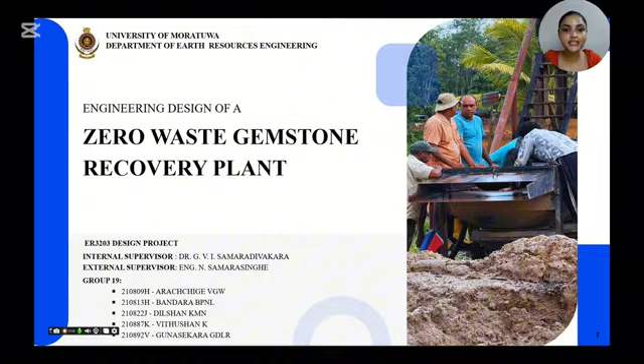We are excited to bring you our very first video, a presentation of our final year design project titled Engineering Design of a Zero Waste Gemstone Recovery Plant. Let's start the video by introducing you to the location that we considered for our design project. So basically this design is for a gem mine in Hidellana, Ratnapura, Sri Lanka.

Talking about this gem mine, they used the underground mining method in the latter part of the 20th century and converted it to an open pit mine in 2012 with a semi-mechanized approach as well. Talking about the composition of the gem gravel, it has a higher content of clay and also fine gemstones, with some minor amounts of trace gold, coarser gemstones and mineral sands, according to the gem mine owner as well as our exposure at the mine.

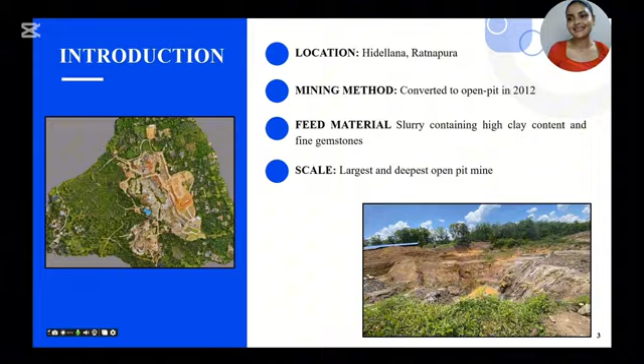Talking about the scale of this gem mine, it is known to be the largest and the deepest open pit gem mine in Sri Lanka. As you can see in the left hand side diagram, this gem mine is a placer deposit, basically a secondary deposit. Now let's take a look at a video which shows you how the current process of this gem mine works.

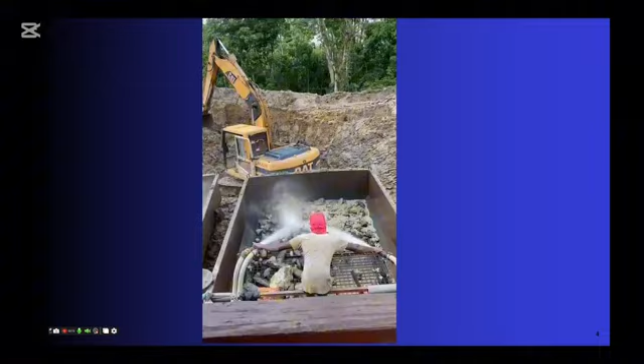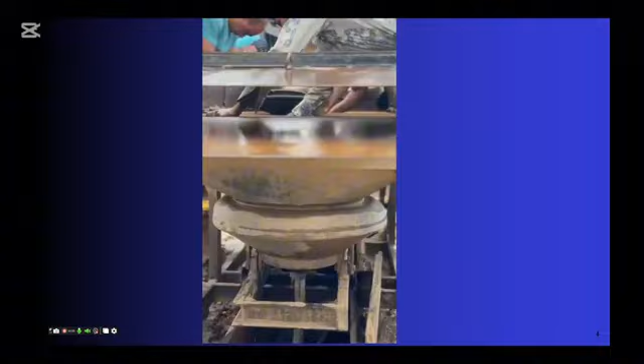Our focus is mainly on the gem recovery process in this mine, and as you saw in the video, the gem recovery process is quite simple in the existing plant. With the current process, once the gem is recovered, the slurry is sent through a continuous settling tank process. It has a continuous 10 settling tank procedure to settle the slurry and get quite clean water in the final tank for reuse. So currently this is how the mine carries out its recovery process of the gemstones.

With that we identified a couple of operational challenges, including challenges that the miners themselves are facing. The biggest challenge of all is the settling tanks filling rapidly. Currently all 10 settling tanks are quite filled with slurry and a lot of overflowing is happening, so their recovery processes have been shut down for a couple of weeks as well. Apart from that, something which rose from our end was the loss of finer gemstones in the slurry.

This has never been identified as a challenge before, especially by the industry, but it could have been. So we suggest that our design could address this challenge as well. There is also the scarcity of water here, because proper water recycling is not happening with the currently available slurry treatment technique.

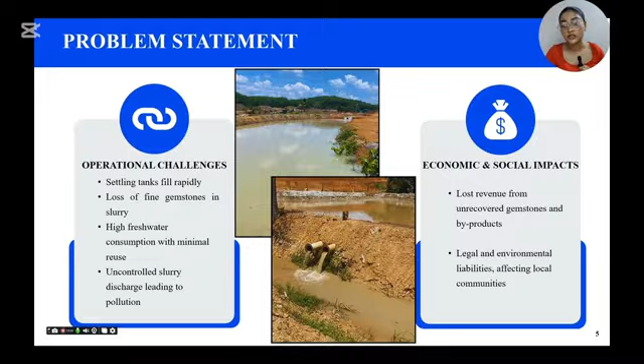Simply, our design objectives are first to maximize the gemstone recovery and also to recover byproducts such as clay, sand, and fine amounts of gold, along with finer gemstones that could be lost. We are also trying to recover mineral sands and sands as well. Another objective of our design is to operate the gem recovery plant with a closed loop zero waste process, to reduce the environmental impact and improve the economic return of the mine.

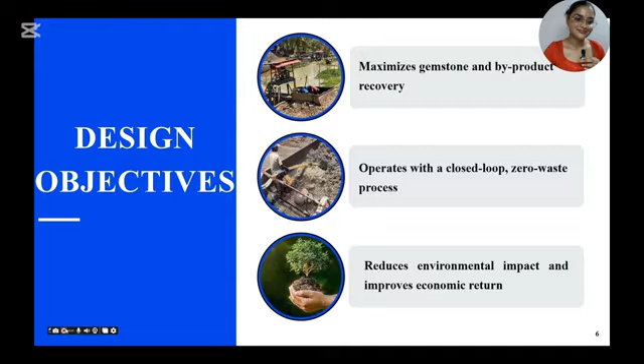With the raised concerns, we got a couple of suggestions from the industry itself, starting with the optimization of the existing plants. This was basically to have a periodic pattern for cleaning the slurry tanks.

That was one of the suggestions we got from the industry itself. Another suggestion was a mechanical slurry separation, basically to improve the slurry treatment instead of focusing on the entire plant. So those were a couple of suggestions we got from the industry. We identified that these suggestions would be temporary solutions for these problems, so we're trying to make a permanent solution in order to make a sustainable gem mining industry in the country and maybe finally in all of the world.

We also got suggestions from the industry to use trommels and vibrating screens for the gem recovery plant, to introduce flocculation for the slurry treatment, and to use the water as a controlled loop, reusing the water as much as possible without using fresh water. So that was one of the concerns we got. We were also asked to look into the economy and do a financially feasible design so that the payback would be within 2 years. These were quite practical suggestions that we got from the industry.

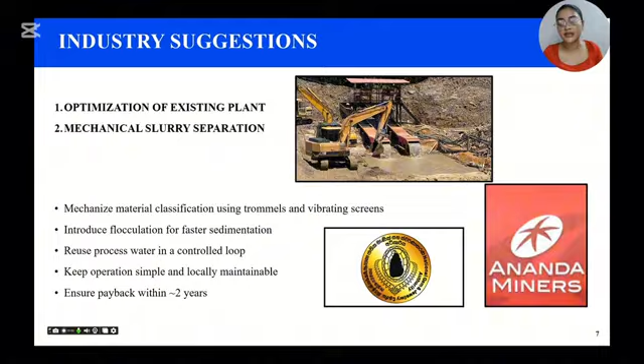Let's move forward. Here we come to our proposed solution. Our solution starts with a hopper with a vibratory grizzly screen, and once the gem gravel is input from there, it will be moved to trommel 1, which only takes particle sizes less than 50 millimeters. It will be introduced to a jig with a net size of 5 millimeters, then to a jig with a net size of 2 millimeters, and then to trommel 2, which only takes in particles less than 10 millimeters. This is basically to recover finer gold in an efficient way.

Next we are introducing the Hungarian sluice box with Hungarian riffles in order to recover the gold. Next we move forward to trommel 3, which only takes particles less than 1 millimeter. Later we will be introducing the hydrocyclone. The fine parts from the hydrocyclone will move to a coagulant tank first. In this coagulant tank we introduce the coagulant, which is moringa powder, to fulfill our requirement of going for something sustainable and biodegradable.

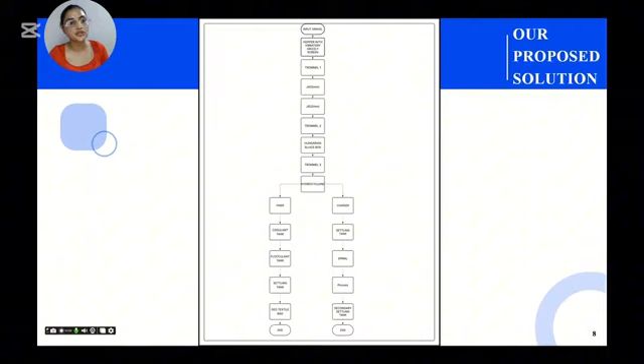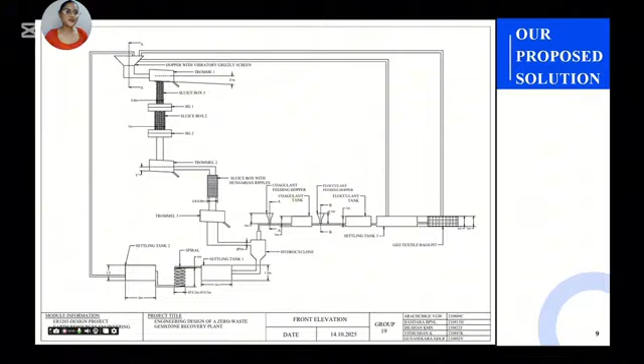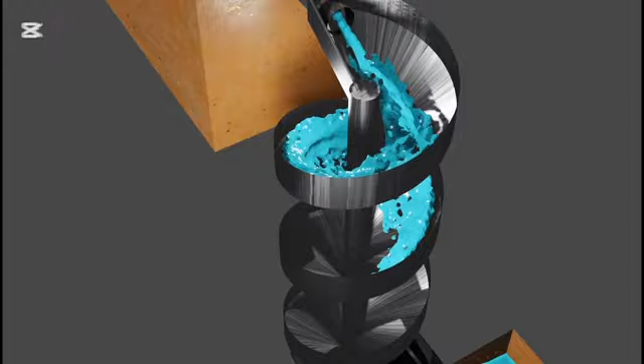Welcome to Earth Thrust Mining. In this video, we proudly present our zero-waste gem washing plant, a sustainable, continuous process designed to maximize gem recovery while minimizing environmental impact. The process begins as gem-bearing gravel is loaded into the vibrating grizzly screen through the hopper. With the help of water jets, the gravel is washed and mixed before being transferred to trommel 1, which separates particles smaller than 50 millimeters.

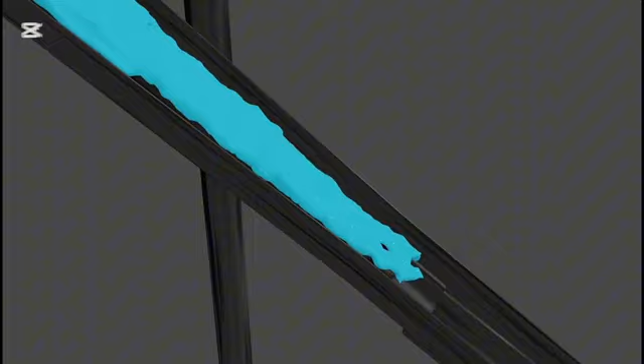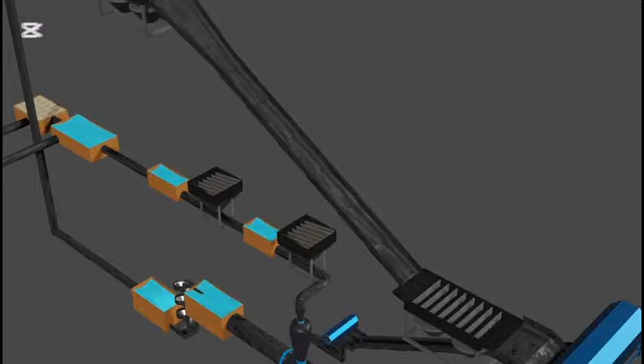The undersized material then passes through 2 jigs. The first jig with a 5 millimeter mesh and the second jig with a 2 millimeter mesh work together to ensure maximum gemstone recovery across different size fractions. Next, the flow continues to trommel 2, screening particles below 10 millimeters. Here, a Hungarian riffles sluice box is introduced to efficiently recover fine gold particles.

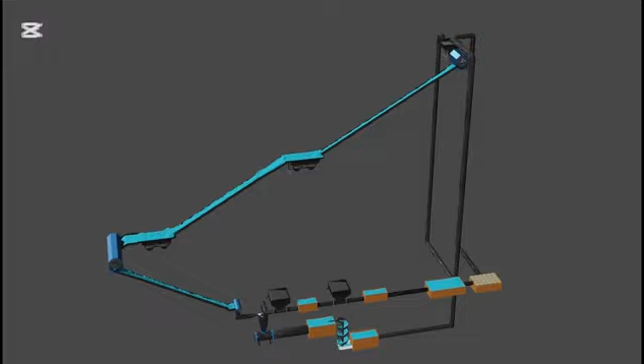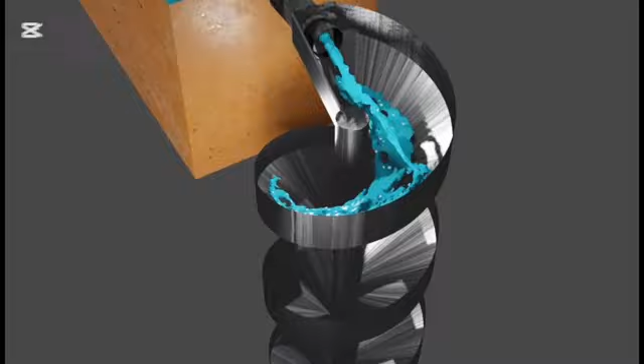The material then moves into trommel 3, which only allows particles smaller than 1 millimeter to pass. These fine particles are directed to the hydrocyclone for further classification and separation. The coarser fraction from the hydrocyclone is guided into the first settling tank, and the concentrated slurry is then pumped to a spiral separator, which recovers valuable mineral sands.

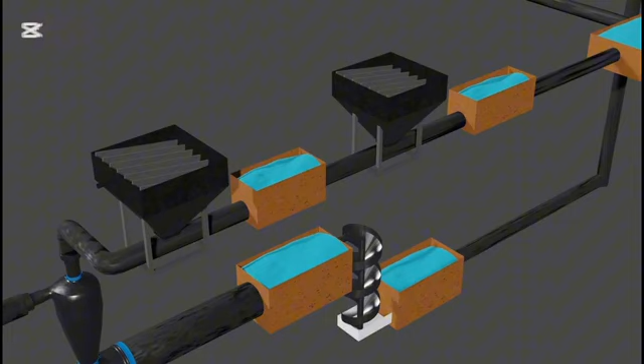The remaining slurry flows into a secondary settling tank where finer sediments settle and water is recovered for reuse. For the finer section, slurry enters the coagulant tank first, where moringa powder, a natural and eco-friendly coagulant, is added. Next, the slurry passes through the flocculant tank, which uses an anionic flocculant to bind remaining particles. The treated slurry is then pumped into geotextile honey bags for dewatering. And then, the clean water in this recycling process is recycled back into the system, maintaining a closed-loop process.

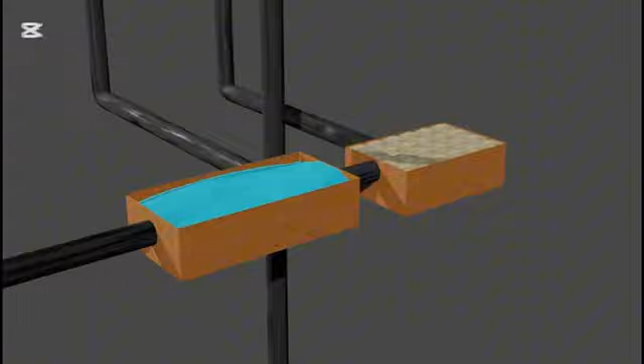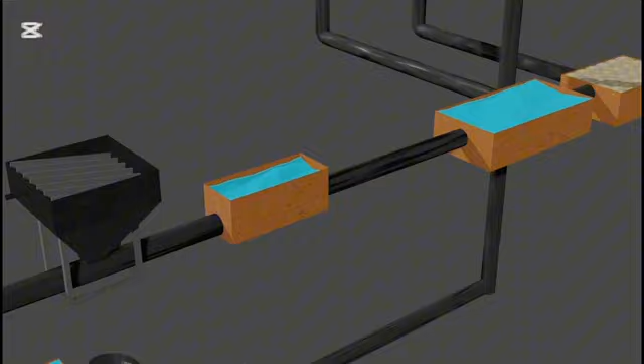Through this continuous integrated system, our zero-waste gem washing plant achieves high recovery, efficient water management, and minimal waste generation. At Earth Pulse Mining, we believe that innovation and sustainability go hand in hand, turning today's challenges into tomorrow's responsible mining solutions. Thank you for watching, and we hope this inspires more green mining innovations for the future.

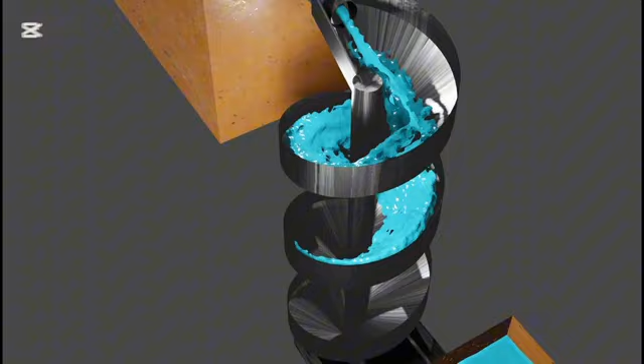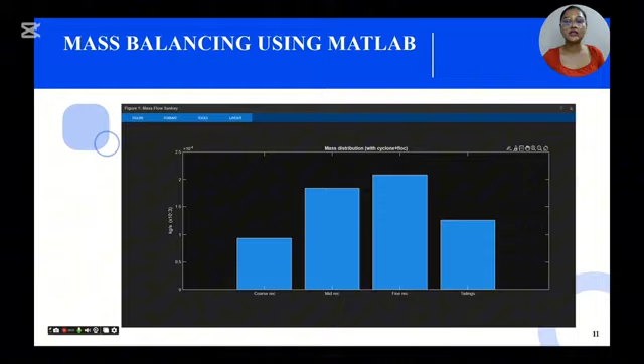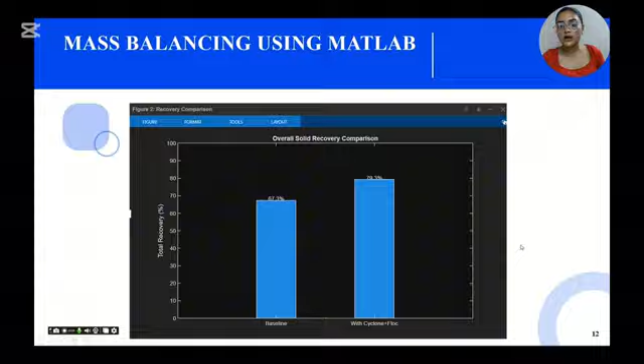We also carried out a mass balancing using MATLAB, mainly for the process after the hydrocyclone, and it will need some more optimization as well. So that will be the next stage of our design. So let's move forward. And this is basically regarding the overall solid recovery after the coarse and the finer sections, and again with the hydrocyclones.

So now we are moving forward to the environmental and safety integration of our design. As we are going with a closed-loop water system and the usage of biodegradable coagulants, and using the dewatering of solids method, and for the dewatering we are using honey bags, we are trying our best to get into the sustainable final segment with the environmental pillar, finally achieving the environmental pillar successfully as well.

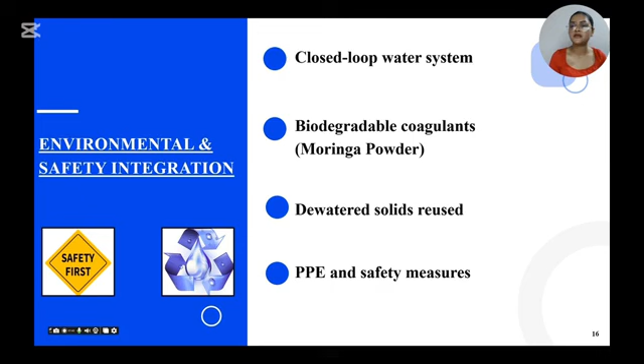And talking about the safety integration for our design, we believe the workers in this plant should be using PPEs, personal protective equipment, and taking safety measures, since we are also using chemicals here with the flocculant usage, and also since this is going to be a mechanized mine, PPE is needed in our design plant.

And talking about the performance and economic analysis, according to the analysis that we carried out, we were able to find out that we could recover more than 95% of gem for sure, and the water recycling is happening closer to 100%. Also, the existing process of these gem mines is currently using a lot of area for settling tanks, and we believe with our technique we could reduce the area of the settling tank by 80%, because in Ratnapura the land area is very important, because the gem gravel is quite consistently available in a lot of the land area.

And talking about the financial feasibility, simply a financial feasibility we carried out of this plant, the capital cost would be around 166,000 USD with an annual operation and maintenance cost of 33,000 USD, and it would be paid back within 1.5 years. And the value we got for our internal rate of return is 70%, which is a great amount. And with that, let's move forward with some main features of our design.

So one of the main features is the multi-stage recovery, maximizing the gemstone capture, especially with the 2 jigs that we have proposed here, and also the hydrocyclone that we use in order to separate the coarse and the finer section, and the flocculation technique that we used for finer particles in combination. And also the design that we used is mostly a gravity-based layout.

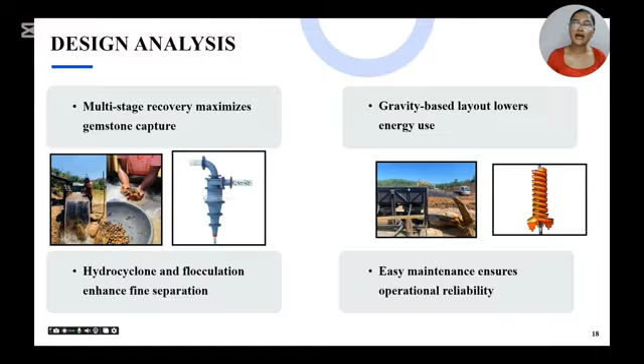So this is simply reducing the energy cost as well. The energy usage is also minimal, which is supporting once again the zero waste concept of our design. And also the maintenance of this design is not rocket science. It would be quite easy here.